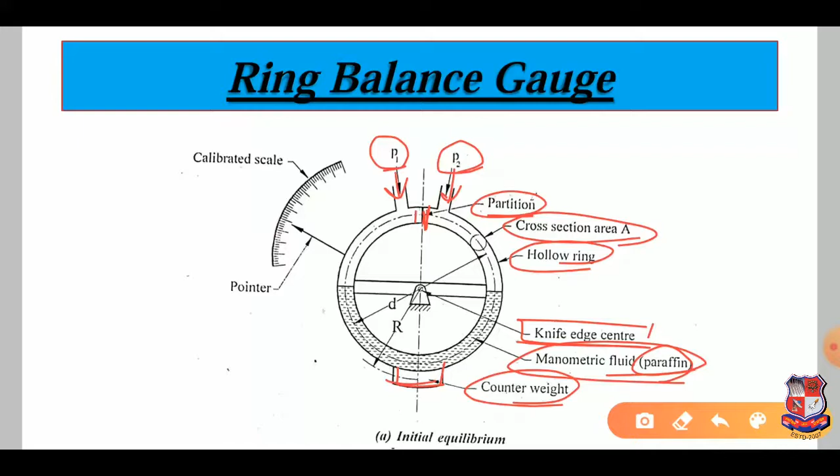The counterweight W is attached at the bottom of the ring, and the open ends of the hollow ring are connected with the tube fluid system whose pressure difference is to be measured. Suppose here this is P1 and here it is P2; between these two we have to find the pressure difference. The connections of pressure inputs are made with flexible couplings and tubing so that the ring can move.

Now it is assumed that the center of gravity of the ring itself, without manometric liquid and counterweight, is at its pivot.

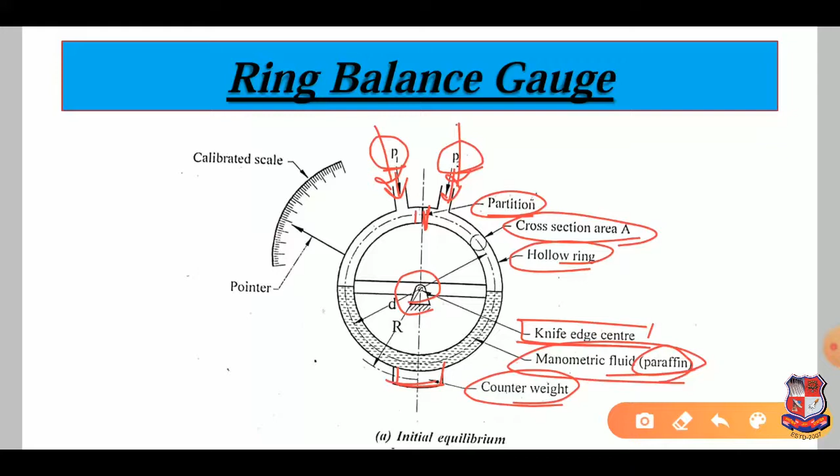When pressure P1 and P2 are fed through the pressure input, the net force due to the difference between pressure, which means P1 minus P2 or P2 minus P1, causes rotation or unbalance of the ring about the pivot. As we can see here, it causes the rotation. In this case, P1 is greater than P2.

As the pressure P1 increases, it lowers the manometric liquid level on its side. Here, P1 will be greater than P2. So as P1 increases, it lowers the level of manometric liquid on its side, and this causes the ring to turn about its center.

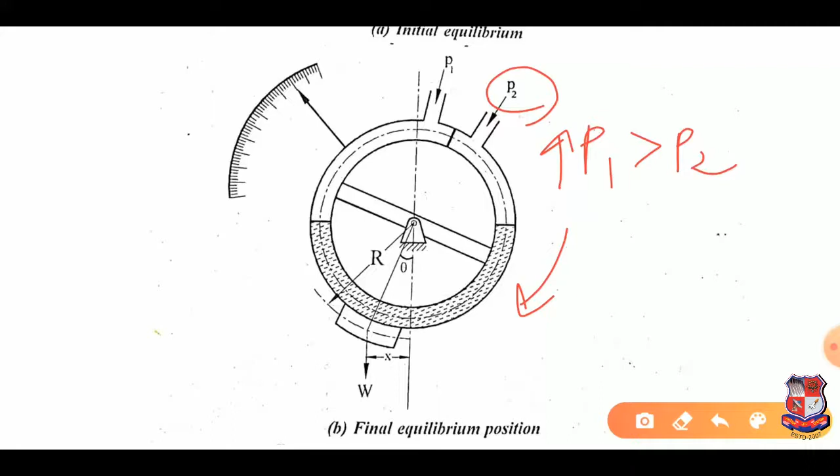The rotation continues until the drive force reaches net equilibrium, and the net force due to pressure difference is balanced by the counterweight, reaching the equilibrium position.

The rotation of the balance ring is transferred to the indicating or recording device. The moment due to differential pressure is equal to the restoring moment due to the counterweight.

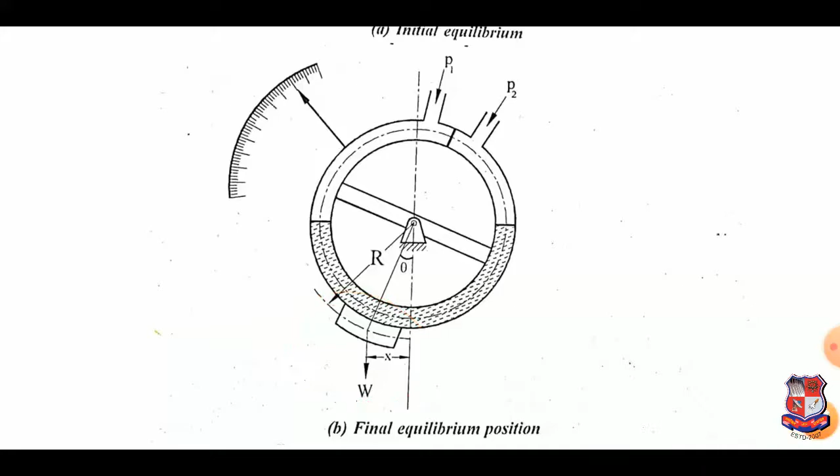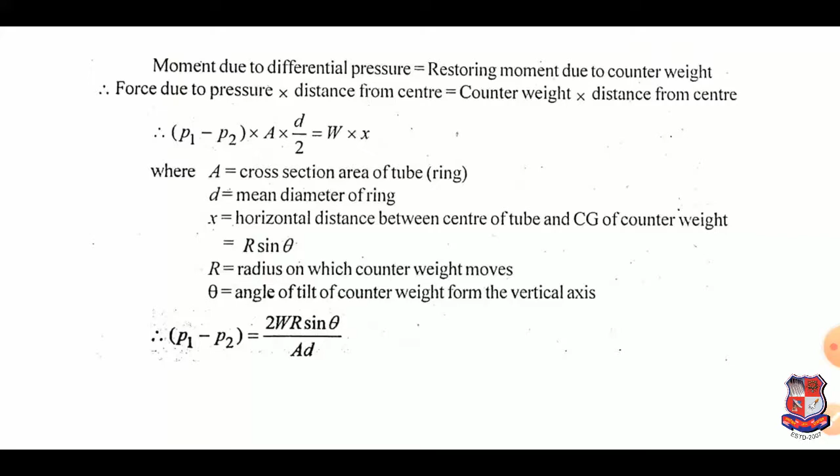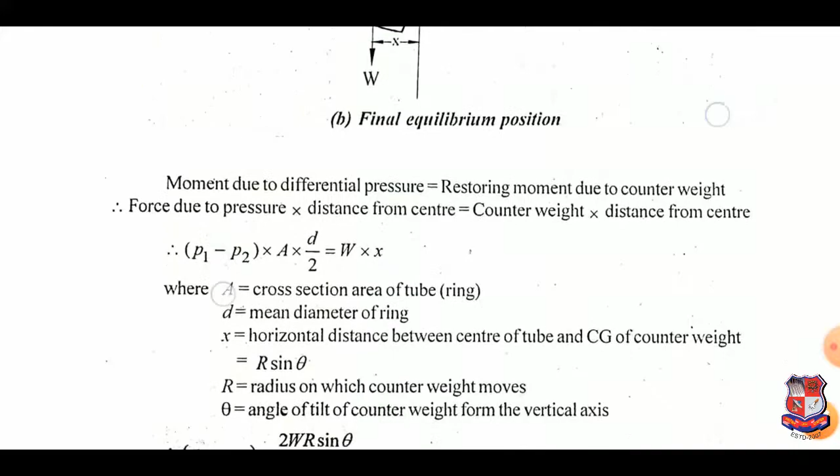The moment due to differential pressure is equal to the restoring moment due to the counterweight. Here two moments are there, due to the pressure difference and due to the counterweight, and both will be equal. So the moment due to the difference in pressure is equal to the force due to pressure, which is the difference between the two pressures, P1 minus P2.

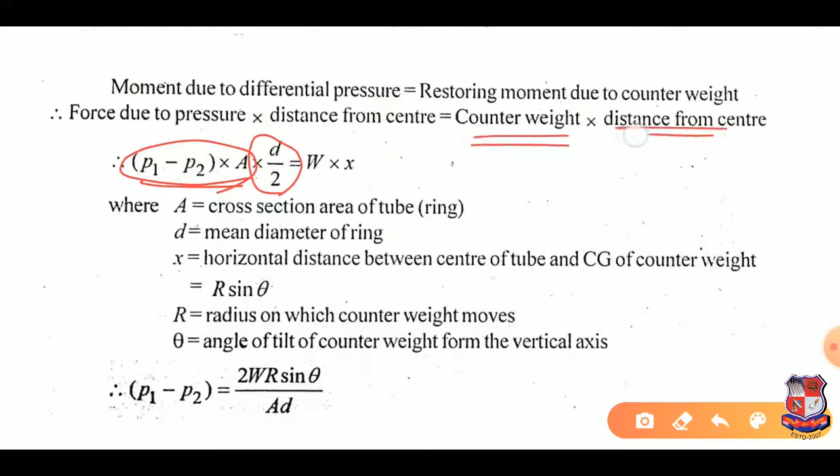Here P1 is greater than P2. The distance from center is considered, and force due to pressure is equal to F by A; since pressure is the difference between both, force will be equal to pressure into area. So it will be P1 minus P2 into area, and the distance from center will be equal to the radius, which means d by 2, opposing the counterweight whose distance from center is x.

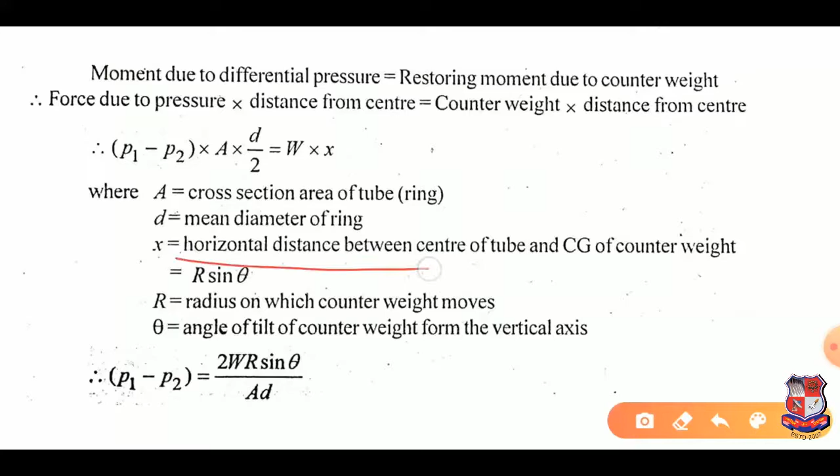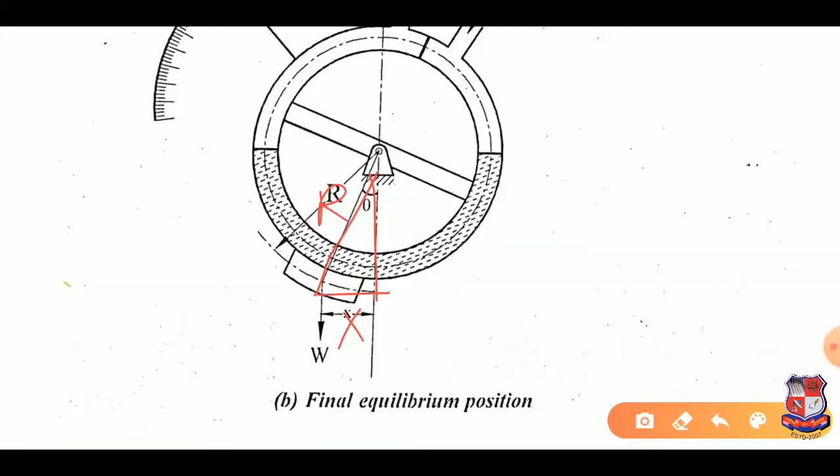This is W into x, which is the restoring moment due to counterweight. Here x is the horizontal distance between center of tube and CG of counterweight. From this triangle we can find the value of x, as this is the radius, so x is equal to r sine theta. Ultimately we can find the pressure difference between both.

So this was about the ring balance gauge. Next is the bell gauge.

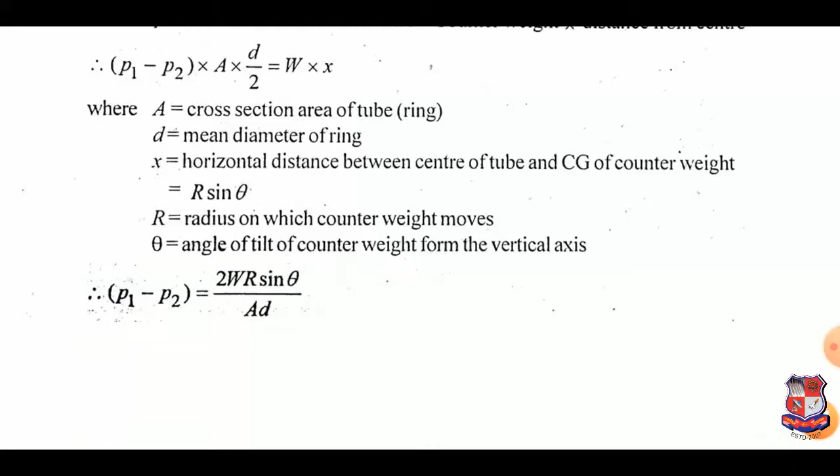The bell pressure gauge operates on the principle that the force produced by the difference of pressure on inside and outside of the bell is balanced against the counterweight, or against the force produced by the compression of spring.

The gauge consists of a bell suspended in sealing liquid, and it is the sealed chamber. The chamber contains oil or mercury. The open end of the bell is immersed in liquid. This immersion forms two separate sealed chambers, 1 and 2.

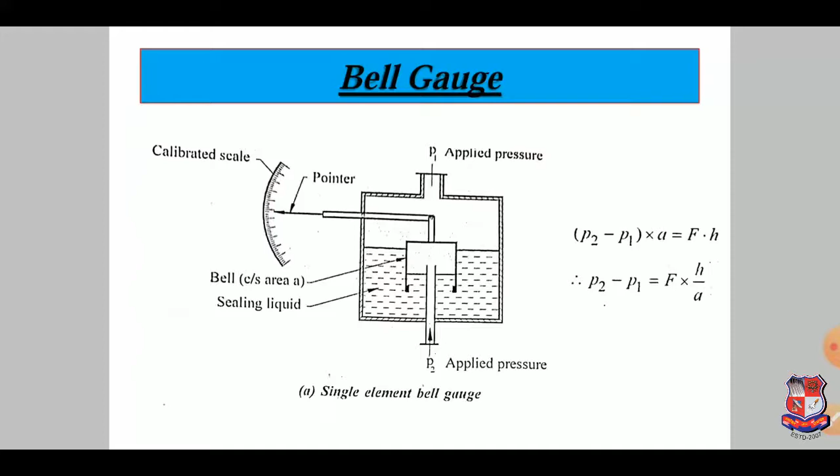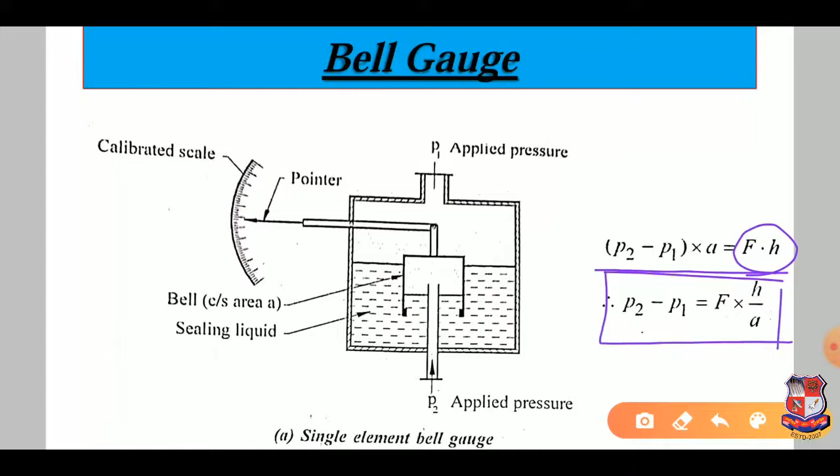Neglecting the buoyancy effect of the weight of the bell, and considering inside and outside area of the bell are equal, the force balance in equilibrium is given by: P2 minus P1 into A is equal to F into H, where F is the spring constant and H is the deflection of spring due to pressure difference. So we can find the pressure difference using this equation. So this was the bell gauge.

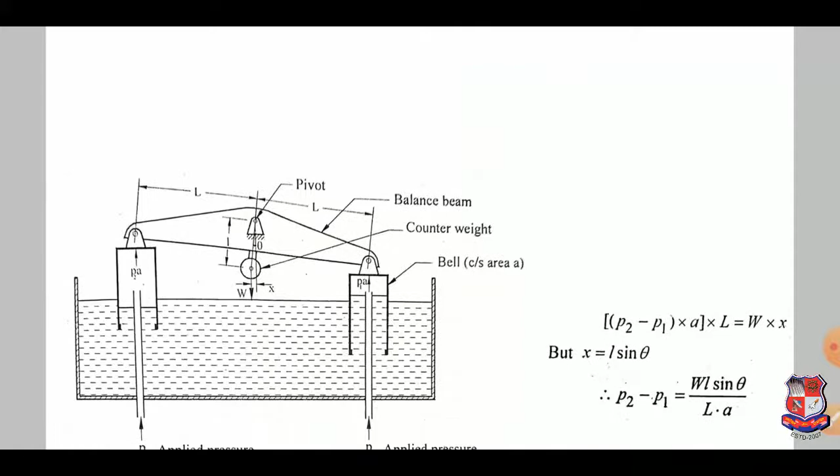A two element bell type differential gauge can also be used. Here there are two bell elements in the gauge; the above one was single element, and here there are two identical bells, number 1 and number 2. Here is the counterweight and this is the balance beam or pivot.

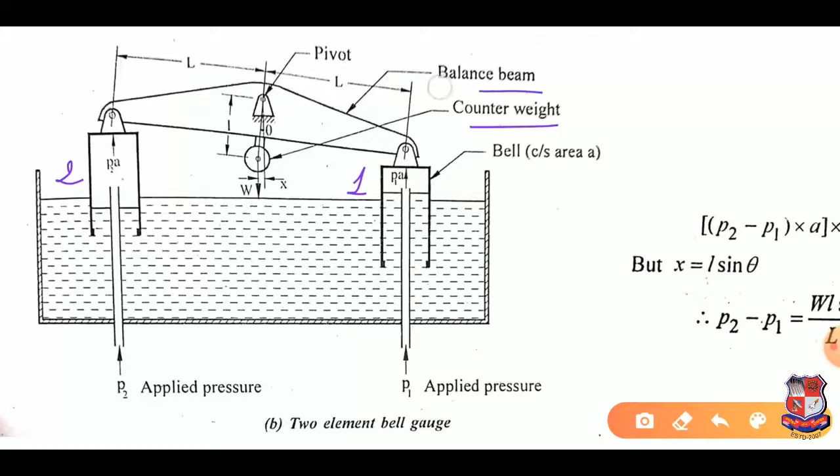This is the height L, here the capital L length, and these are the bell cross section areas, with P1 applied here and P2 applied here. It consists of two identical bells immersed in a bath of sealing liquid. The light metal bells are supported on a beam pivoted on knife edges, shown here as the knife edge pivot.

A counterweight W balances the deflection due to the pressure difference P2 minus P1. When pressure is applied inside the bell, one bell will rise and the other will move accordingly, and the position of the bell is achieved due to the moment of the counterweight W into X. So for the equilibrium position...

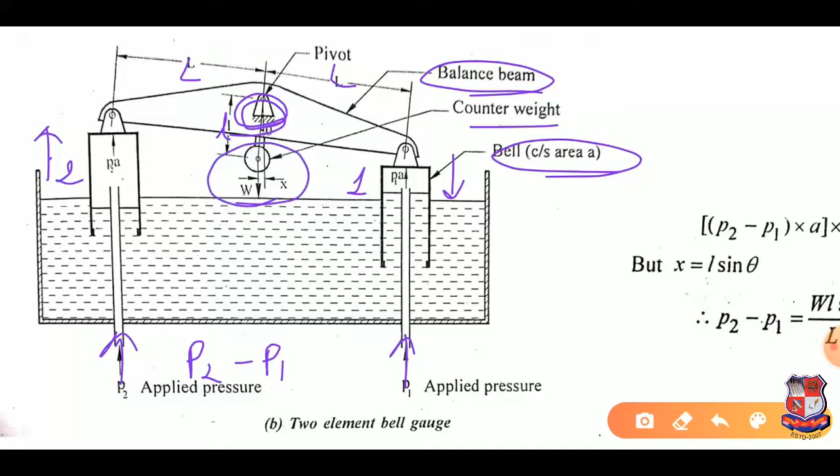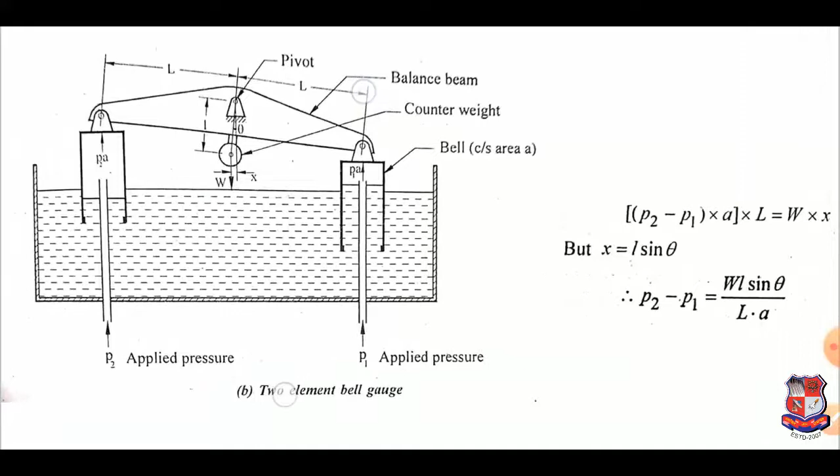Here is the equation: the difference between both pressures, P2 minus P1, into area of bell, into moment L, is equal to W into X. Here x will be the same as L sine theta, where theta is the angle, so we can find P2 minus P1.